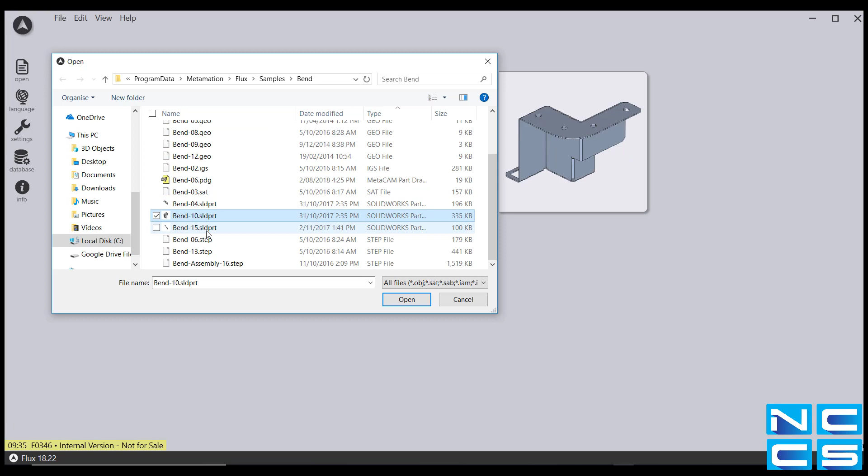First thing I'll be showing you is the flexibility that Flux provides you when importing files. As you can see here, this folder contains 17 files of multiple formats. You have your DXF, IGES, SOLIDWORKS, 2D and 3D files. And what you're about to see is that Flux can import them all at the same time. I just select all and click import.

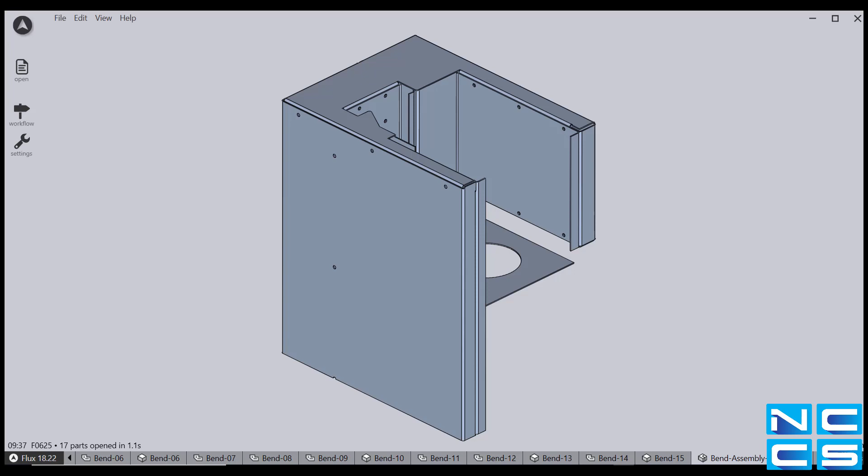And as you can see here, all 17 files were imported in just over 1 second, averaging approximately 0.06 seconds per file. We have also tested this for 100 different files, and all of them were successfully imported in well under 10 seconds. I'm sure you can imagine that not having to discriminate between file types will greatly speed up your work process, making Flux that much more user-friendly.

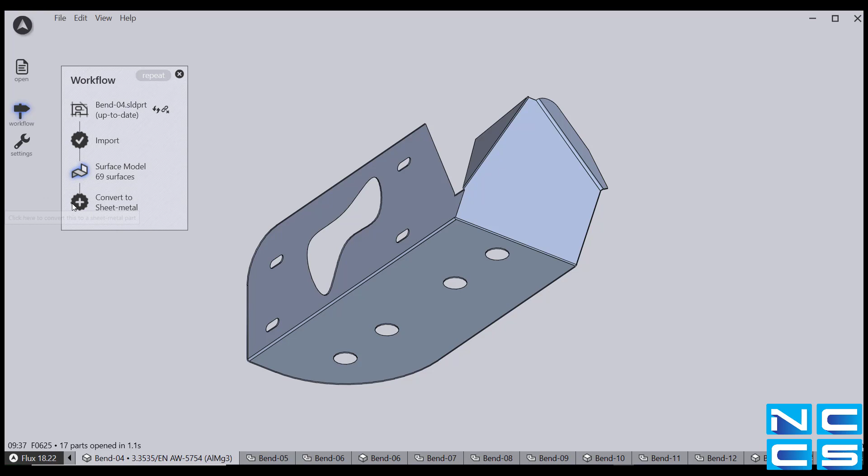Now I'm going to show you the simple process taken to generate an NC code for your part. First, I click on the workflow icon, and right away Flux gives me the ability to convert to sheet metal at the click of a button. Once a sheet metal part, Flux allows the user to unfold their part for a flattened view. When flattened, you can see the bend lines along with the angles that each segment will be bent.

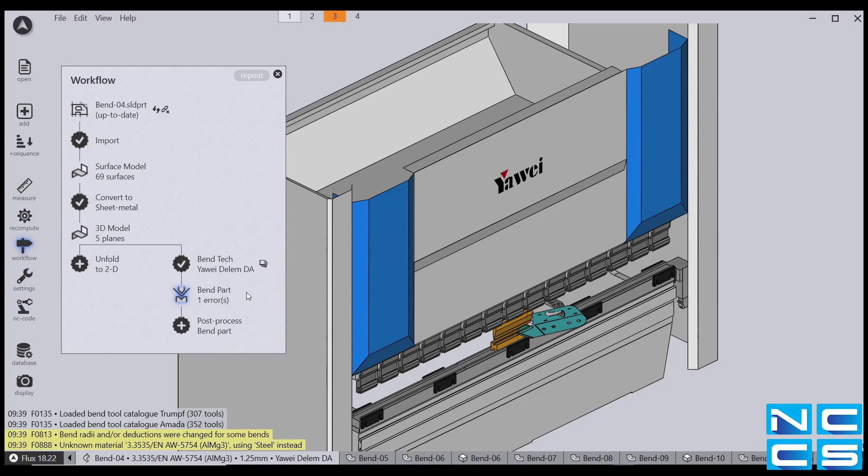Flux also allows you to select your machine from a vast database containing machine brands from Amada to Yawei. Just select your machine, click the plus symbol, and there you go. Sequencing your part has also been greatly simplified. When you select your machine, Flux auto-sequences the part for you. However, if you want to see or change the order in which your part is being sequenced, you simply select the sequence icon and Flux will show you how your part is being sequenced.

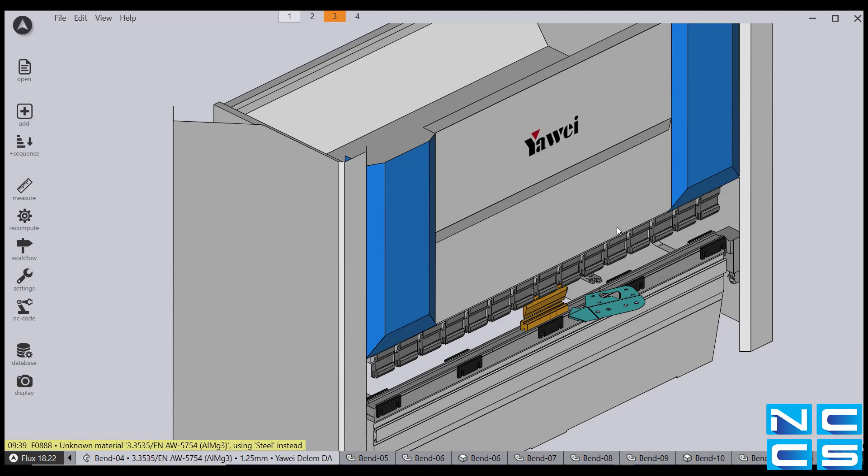Flux will also provide you with a visual of your machine, as well as what your part will look like as it's being bent. Just drag your mouse to the top where the numbers 1, 2, 3, 4 are, representing your bending sequence, and hit play. Now, before we hit play, I'd like to focus your attention to the 3 which is being highlighted. This is one of the ways Flux is telling you that an error will occur.

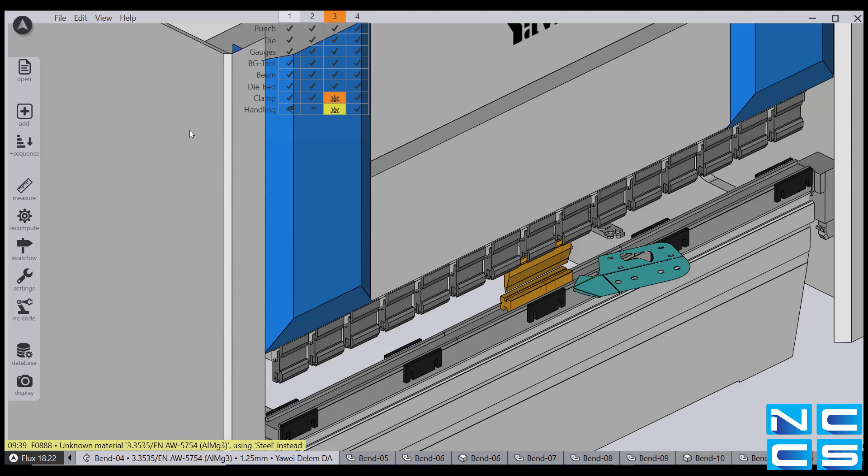To find out what the error is, simply hover your mouse over the 3 and it will display what is going wrong. And as you can see, the part is colliding with one of the clamps. So, I'm just going to slow it down a little bit. And now I'm going to run the simulation.

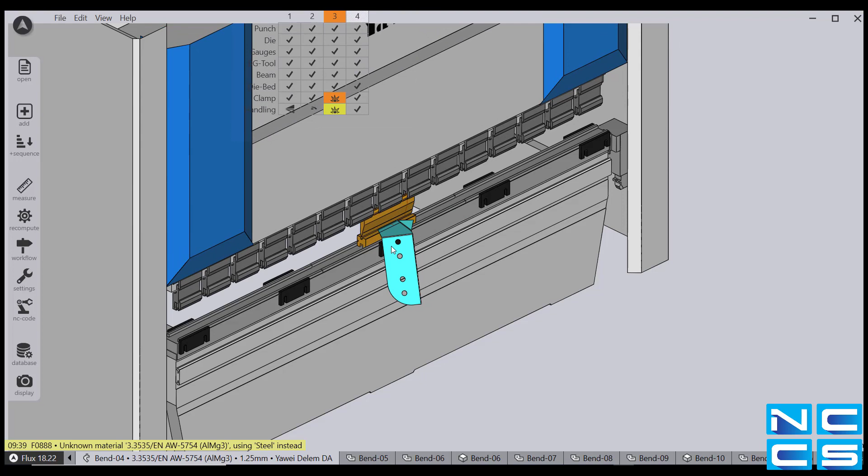Now, some of you may have noticed that during step 3, one of the clamps was highlighted in red. This is Flux showing you which specific clamp the part is conflicting with. And to change it, we simply go back to step 3 by clicking on the column 3, select the clamp, and click remove. It's as simple as that. Now I'm just going to reposition the clamps and run through the simulation again.

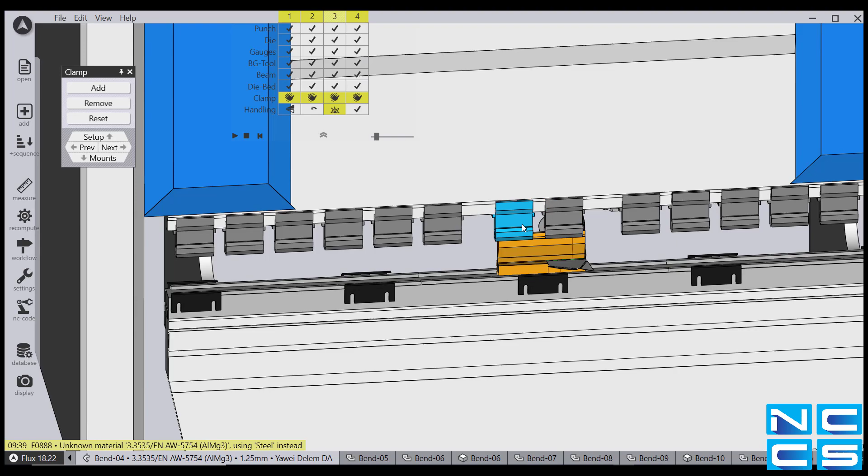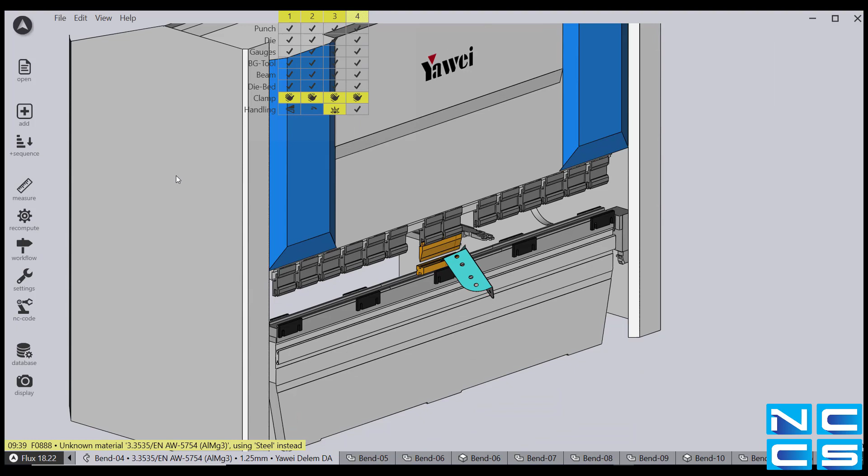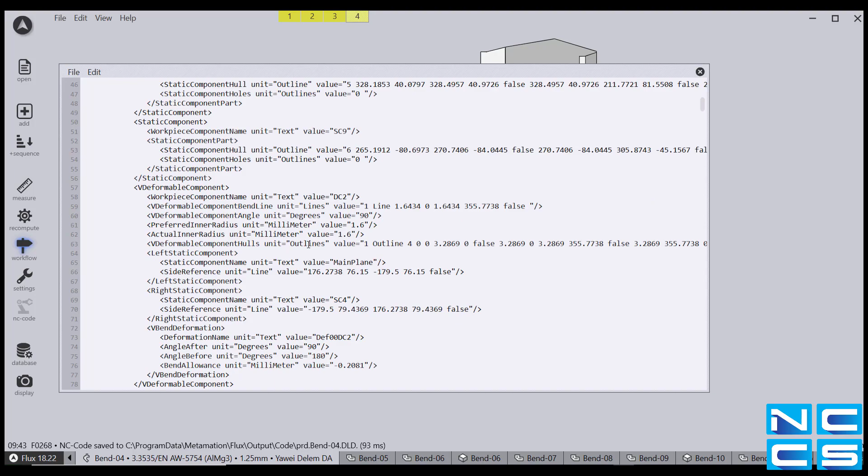Once we're happy with that, we can then go ahead and generate the NC code. To do this, we simply go back into Workflow and click Post Process. To view the NC code, we go into Workflow again, and under Bend Outputs, we can click View NC code. And for those of you who can read the NC code, there it is.

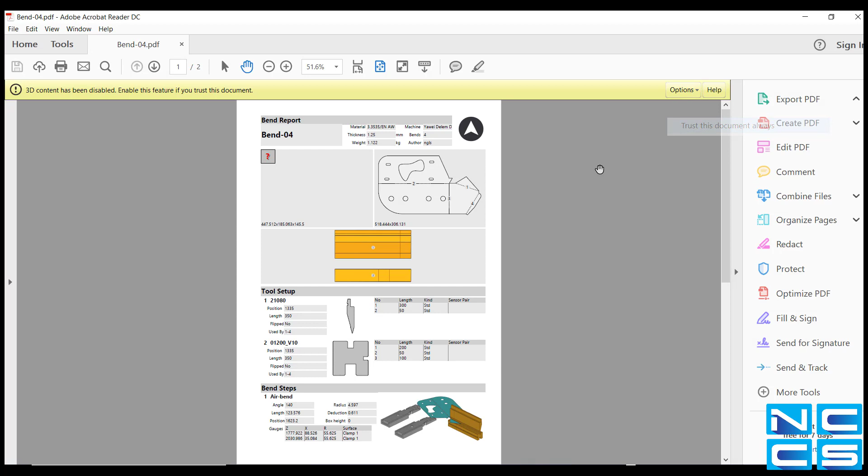Flux also has the capability to automatically generate a bend report. By going back into Workflow and selecting View Bend Report, Flux will generate a report containing information such as the tools you've used, sequences, backgauge distances, and more. And that is a brief introduction to the software that is Flux.